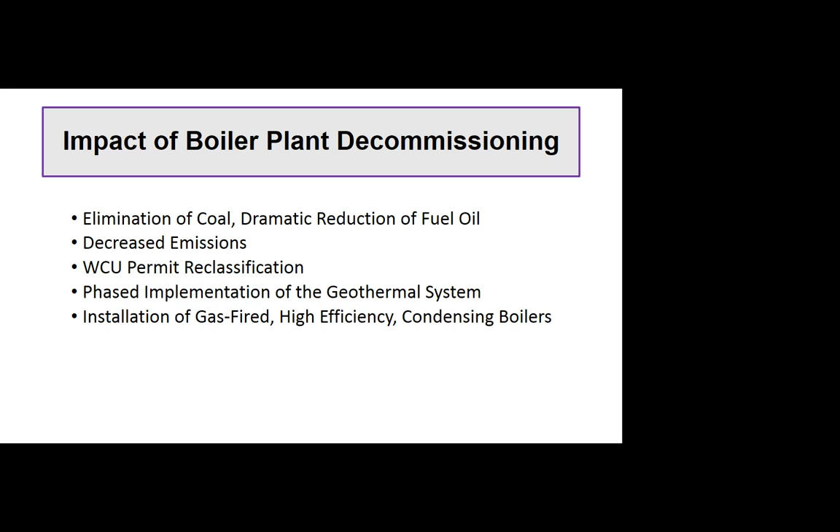So overall, I guess the takeaway is we replaced an energy source or energy sources that identified West Chester University as a major polluter. We actually replaced them with a renewable energy source, and that would be geothermal. And that was a huge success, actually, an impact on the university as far as sustainability.

Just to give you an idea what those emissions look like. This chart in the shaded area here, these are the energy sources associated with the boiler plant. And as you see, they disappeared after 2014. These are the CO2 emissions in tons of CO2 that were emitted when the coal was burned or when the oil was burned. These other three are what we use on campus anyway, which would be the natural gas, the electric, and then the fuel oil that's used in those 7 houses. The overall totals are shown here.

And you see, in this area here, prior to the decommissioning, we were in the 50,000 tons a year. That's what we were emitting from utilities. This is not the total amount because there are other sources. These are just amounts from the utilities. After the decommissioning, you could see we dropped into 30 to 35,000 tons a year, which was a big effect. So again, the impact is we were able to reduce our emissions in the area of 35 to 40%, which is a big number.

And the reason for this chart is to show that we continue to monitor all this, as you can see in yellow there. This is through January with fiscal year 2021's emissions due to the three energy sources there.

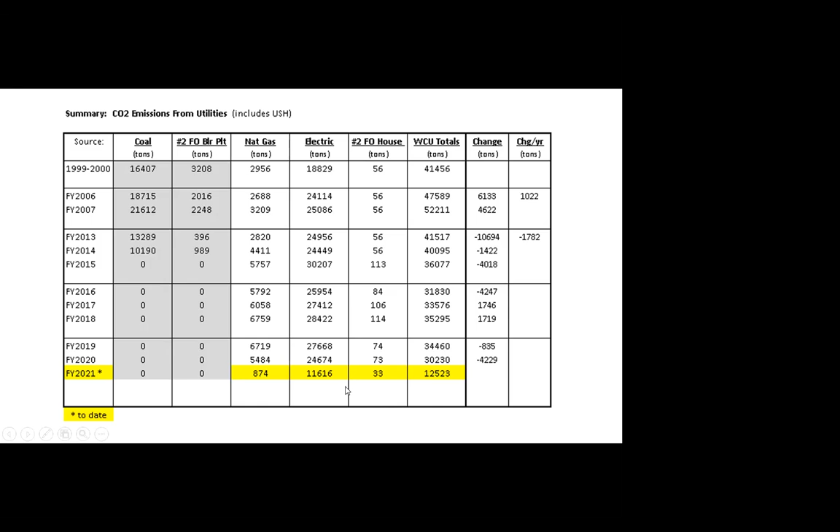As far as our current energy sources, we have both purchased sources and generated sources. Our purchased sources include electricity, natural gas, and fuel oil. For the electricity, West Chester University actually owns its own substation, which is located out there on New Street. From that substation, the electricity is distributed to a majority of the buildings on North Campus. And in addition to the substation, we also have a total of 48 individual PECO services that are connected to other buildings that aren't on the substation. The substation also services Sturzebecker, which is down at South Campus.

To supply the electricity, we do contract this out to try to get a good price. We work with PSFEI on this contract, which is Penn State Facilities Engineering Institute, a group of engineers and other experts up at Penn State whose services are available to West Chester University. So when the contract is up and we go out for another contract, we contact Penn State PSFEI, and they'll go out and ask other universities in PASSHE.

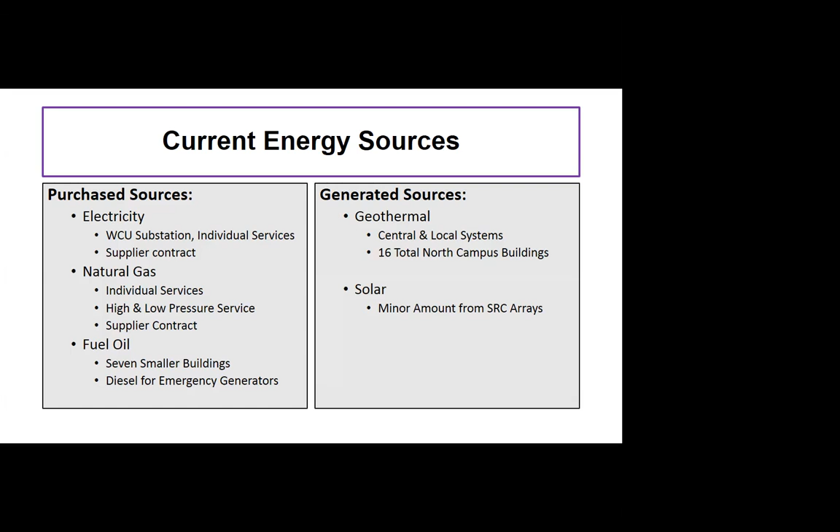So in total, there are 16 buildings on North Campus that are connected to a geothermal system. And then, as I mentioned before, we also have a solar system, which consists of 3 arrays that are mounted on top of the student rec center. And we'll go into that a little more later on in the presentation. Basically, that's our energy sources right now, and how they're divided into purchased and generated.

As I mentioned before, one of my responsibilities is to monitor and measure what we use. The majority of the data that we gather is actually based on the utility invoices. This is where we get the amount used in the buildings and what it's costing us per building. But we also get a lot of data from our BAS system, which is our building automation system. We need both to generate the data we need.

An example would be the electric energy that comes into the substation on New Street. From PECO, we get one bill for that substation. It's a big one, but it's one bill, and it gives you usage at the substation and the cost. Then from there, it's distributed to the different buildings. The way we know how much each building is using is that in each building, we have an electric meter that's set up and connected to our BAS system. So we can record the usage every month in that building, so we know.

Another example of using our BAS system would be for the geothermal. In each one of our geothermal buildings, we have a BTU meter. And from that meter, we can gather information on usage of geothermal energy in that building. We gather all this information, and from that, we can generate campus energy usage profiles for each one of these energy sources. So we know throughout the year, and each month, how much energy we're using from each one of these sources.

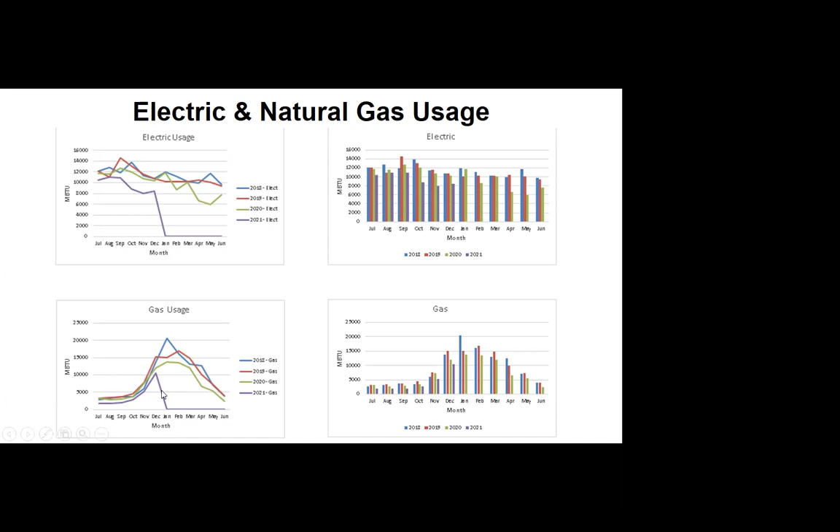Again, with the gas usage, you see it peaks out December, January. They're the winter months. That's what you would expect. You're using gas to heat the buildings in the winter months. And again, we see much lower usage in 2021, but that's because the set points are much lower. If we look at fuel oil and geothermal, fuel oil actually mimics the gas usage. It peaks out in the winter time because that's when you use it. However, you have to look at the range over here in the MBTUs, where you're in the hundreds here. Back in the gas usage, you're in the tens of thousands. So it's a big difference in how much is actually being used.

If you look at the geothermal, you'll notice that most of the geothermal energy is used in the summertime, July, August. That's when we're at our highest over here. This tells us that it takes a lot more geothermal energy to cool those buildings than it does to heat them. And this is reflected in what we see during our daily monitoring of the geothermal system. In the summertime, we'll see a much bigger temperature difference between the water going out to the system and the water coming back, and the flow rates are much higher. So we're using a lot more energy from the geothermal well fields.

In the summertime, in the wintertime, it's amazing, but a 2-degree difference at a lower flow rate is enough to heat those buildings out there. It's amazing to me, and it always was. But again, this just goes to show that we use a lot more geothermal energy in the summertime. And from this, we could do a lecture alone or a presentation alone just on this geothermal, because it explains why our well fields are heating up and things of that nature. But again, that's another presentation in itself.

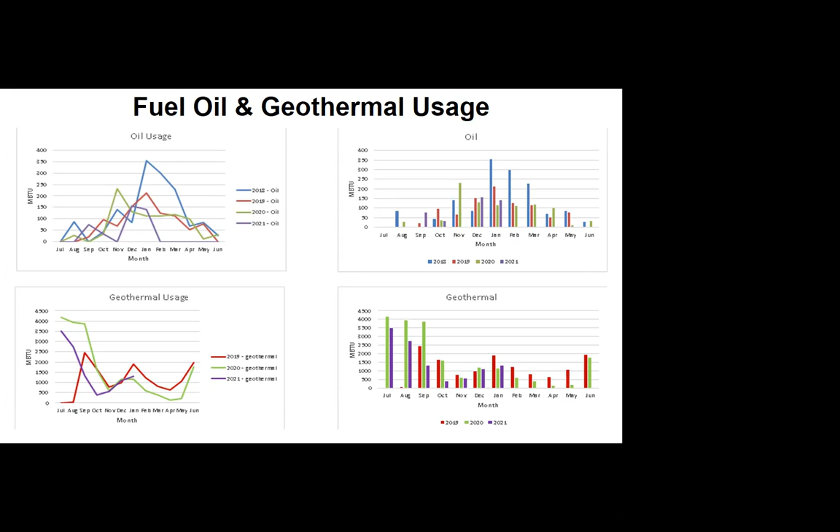But this just reflects what we see, and we know that we're using more energy to cool those buildings rather than to heat them. The total, if you put all these together, you look at the total. Again, this reflects what we see in gas and oil. So we're peaking out in December, and we peak out in gas and oil, which kind of directs our focus to where we should be looking in terms of efficiency during the wintertime. So basically, it's the same year to year to year. And again, you'll see a much lower in 2021 due to COVID changes.

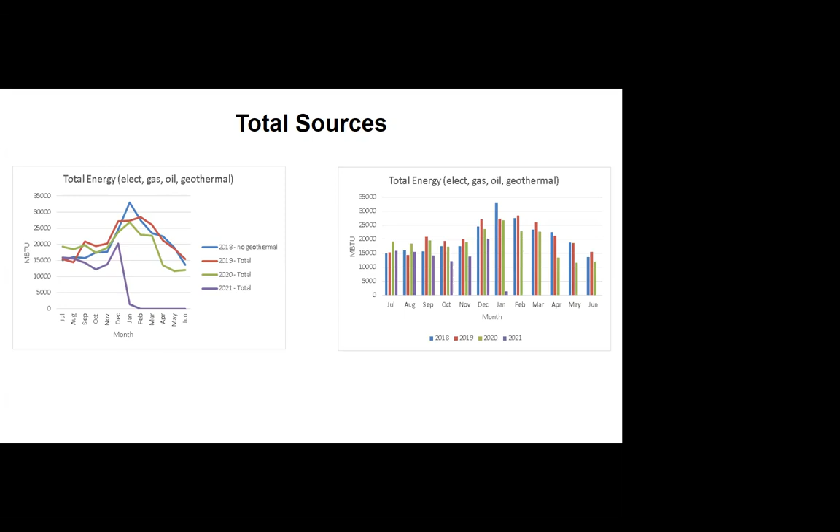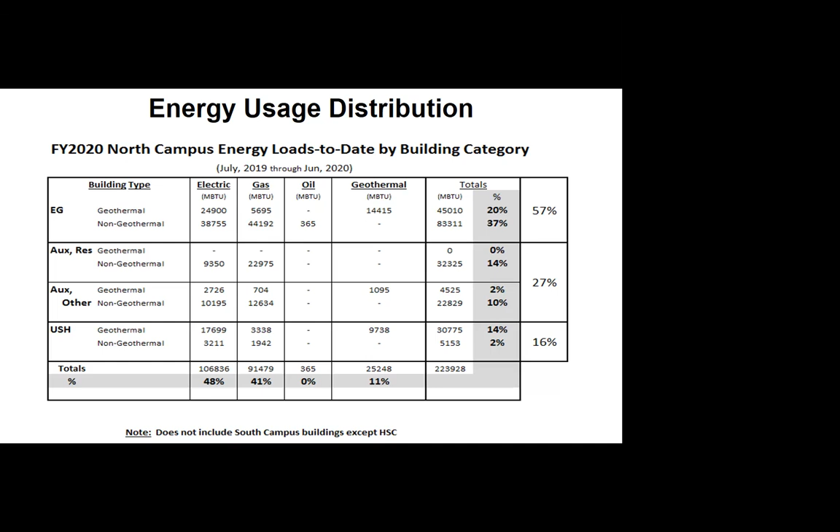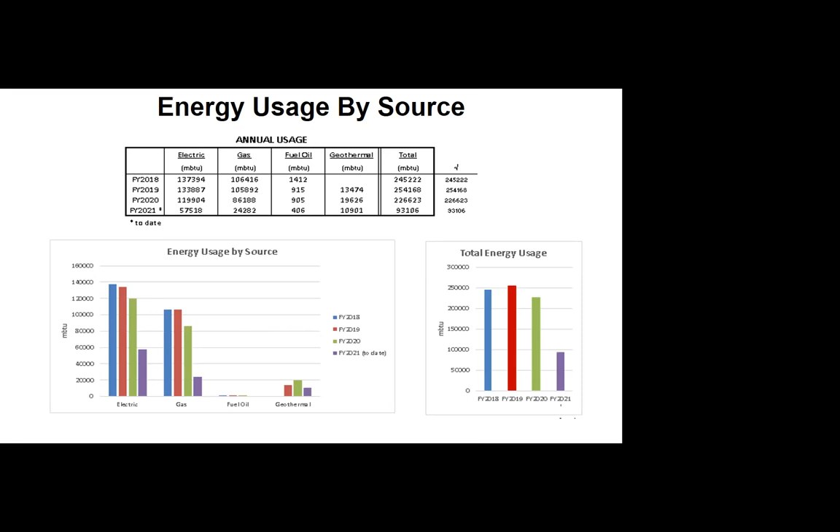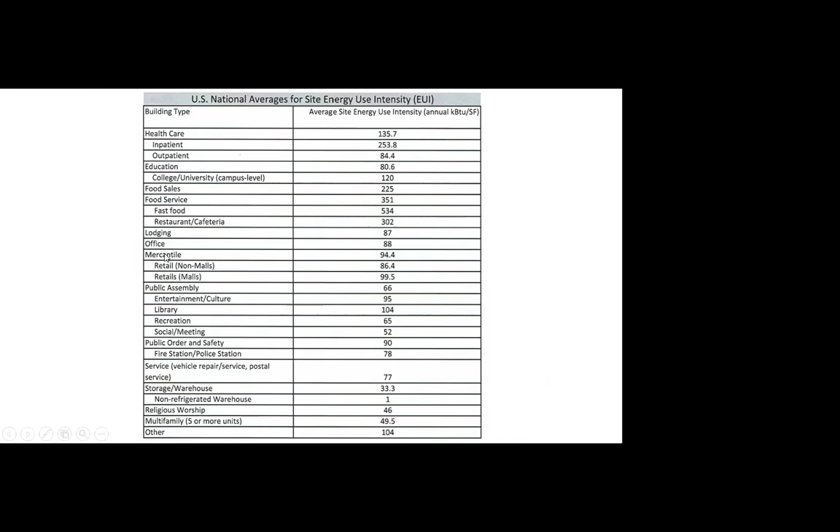We mentioned energy usage index, which is usage per square foot. There's a U.S. national average out there, and this is a list of those national averages for EUI. If you look down here to education, and more specifically college or university, on a national average we should be using about 120 kBTUs per square foot of building, which is 0.12 MBTUs per square foot of building. Keeping that in mind, I know you can't see this, and I couldn't get the whole chart on there, but I just wanted to show you that we track this. This is actually over here on the left side.

This is actually the same distributions I showed on our distribution slide. So this will be for the E&G buildings, and this chart goes down further. But for the E&G buildings, non-geothermal, our average EUI, which is right here, is 0.022 MBTU per square foot, and that's much less than 0.1. It's a factor of 10, which is really good.

And then at the same time, I track our dollars per MBTU, and right now for this type of building, we're tracking about 23 bucks a square foot, an MBTU that we're spending. If you go down this chart further, the highest you'll see on that chart is 0.53 for an EUI, and that's for auxiliary dining non-geothermal.

So again, we're far below the 0.12 that we're supposed to be if you want to look at the national averages. But right now, I think personally we set our own bar, and we go up and down there. So by continuing to do this, we'll generate where we should be on our own average and try to stay at that point. But that chart's back there on my wall, so I know you can see that as clear as day, so we're good.

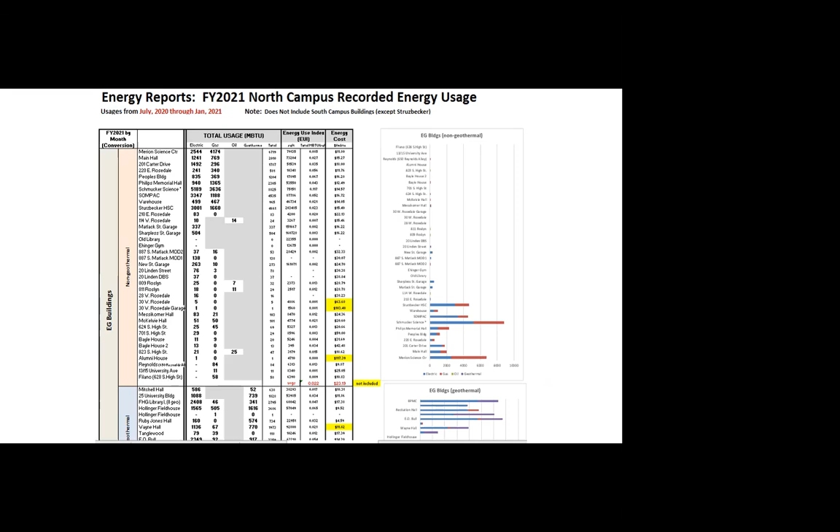Okay. This I threw in here because it was a little eye opener to me. I just wanted to share it with you. I was trying to determine how much per MBTU that we spend for electricity, for natural gas, and for geothermal. For electricity and natural gas, it's a pretty straightforward calculation because you have all the numbers. So in fiscal year 2020, which this shows here, we could pretty much calculate what it cost us in electricity and gas. But for geothermal, it's just a little trickier.

And this is by no means a rigorous calculation. It just gets us in the ballpark. But what I did, if we take fiscal year 2020, for example, each month we have a BTU meter in the pump house, which tells us what the BTUs are going out to the entire system, and that's registered right here. So in August of fiscal year 2020, we had 3,948 MBTUs go out to the system. In the pump house itself, there's a meter that tells us we use 138,000 kilowatt hours.

And based on the fiscal year cost per kilowatt hour, we came up with the cost. So we know the usage, we know the cost, we come up with the cost per MBTU. So we see here in fiscal year 2019, we averaged $3.40 an MBTU to generate geothermal energy, 3.25 last fiscal year, and to date we're 3.46. Compared to right here, electricity fiscal year 20 almost $20 an MBTU, gas almost $8 an MBTU.

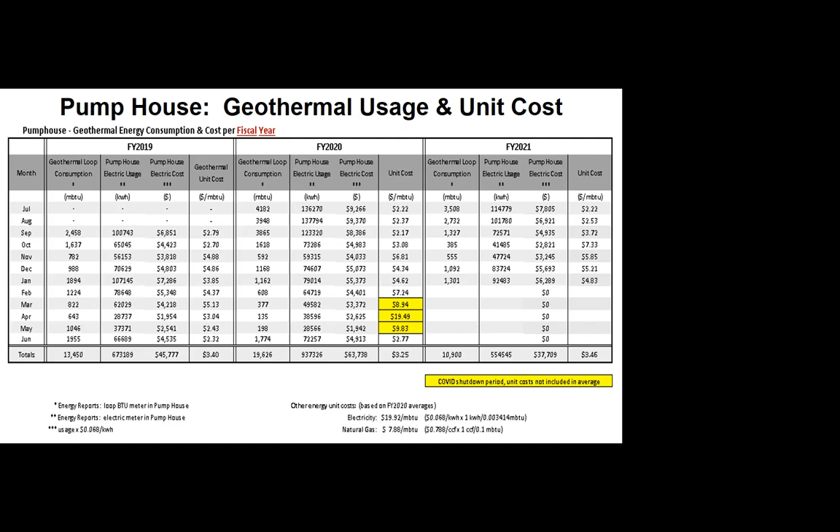So you could see. But going back to that one bar graph, changing that graph a little bit not only impacts sustainability, but it has a financial impact too. And it's shown right here. Again, this isn't a rigorous calculation. It just gets us in the ballpark. But it shows you there's quite a difference.

The solar that I spoke about earlier, we have 3 arrays that are on the roof of the student rec center, and through our building automation system, we can go back. And I went back to April of last year, and I came up with the amount of megawatt hours being produced by these arrays each month. And right now we're averaging about 2.2 megawatt hours a month, which is good.

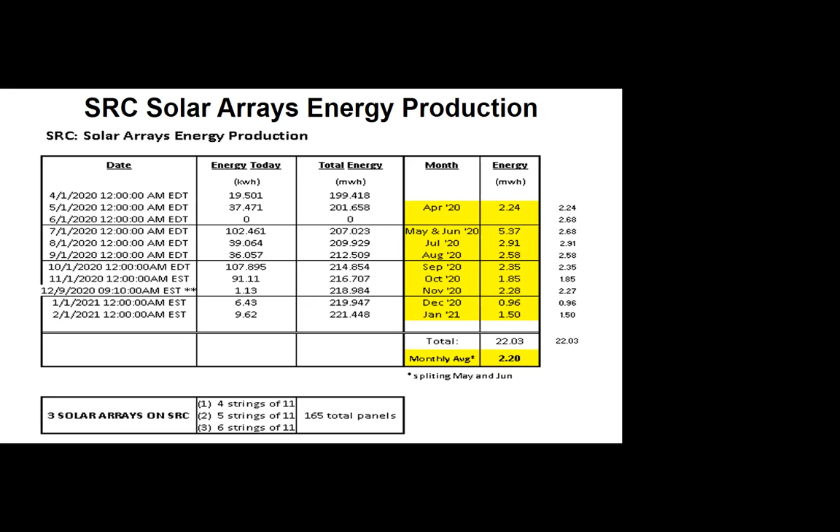Okay, but in overall terms, even though this is good, that amounts to about 26 renewable energy credits a year, which is good, but it's not much. That's why I said it's minor. But all the energy that's generated by the solar array goes right back into the building. It doesn't go back to the grid. We don't get any credit for it. It just goes right back into the building that's being used. But that just shows you that we do measure this too. We have the ability to measure it, and we do keep an eye on it.

As far as controlling energy on campus, this is strictly from an operations standpoint. Our number one and primary control is through the building automation system, the schedules and the set points that we could establish for each and every building. We have occupancy schedules, we have non-occupancy schedules, and we have the set point. So by manipulating this a little bit, we can control our energy usage.

And hopefully by keeping an eye on us, we get every week, I forget who does this, but we get a record of where events are being held and how long. And we will adjust our set points for that particular building to accommodate those people, and then they go back into unoccupied. So we're doing the best we can as far as controlling energy with what we have.

We also can control our supplier contracts too. This has more of an impact on cost than it does on usage, but still it's an impact. So by going out and continuing to try to get the best prices we can, we'll do that, and that's within our control. Renewable energy credits: we control how much we purchase. So we can purchase more, get more credit to go against our carbon footprint, or we can purchase less. And I have a slide coming up to show you our past purchases there. So we do have the ability to control that.

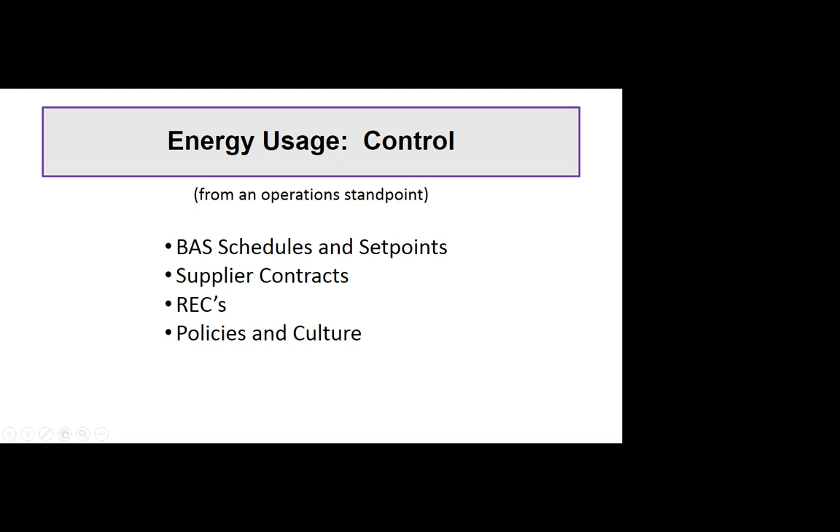But the idea is to get the word out there. And believe me, I'm not an expert on this, and I don't have any background. I'm a numbers man. But at the same time, I know how important it is to get that message out there, to be very mindful, to be very conscious, to be very aware of how much energy you're using and in what way you're using it, because it will impact the university and its goals of achieving a high sustainability.

The renewable energy credits, the amount that we purchase is usually based on how much we use in electricity. In past years, we always purchased 30%. I can't tell you where this number came from or what it's based on, but that's what we did. We always purchased for 30%, which amounted to 12,000 megawatt hours. In 2019, the decision was made to purchase 100%, which is 45,000 megawatt hours. And then we dropped back down to 30% in the last contract, which was a 2-year contract.

When we do go out to purchase renewable energy credits, we again work with PASSHE. We will go out with West Chester, with other universities, and try as an aggregate to get the best price we can. And it works, it really does. But as you see, prices go up and down here. And it all depends on the market and what everything's doing at the time.

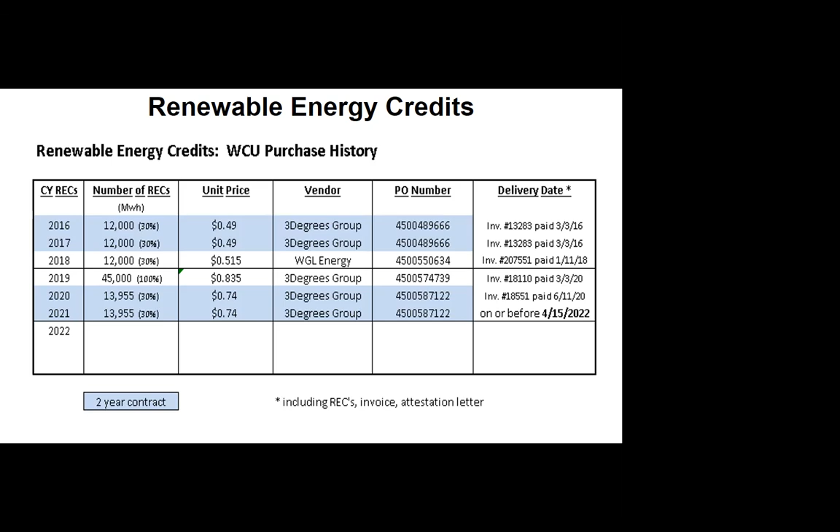But right now we're good through 2021, and 2021's renewable energy credits actually will be delivered in the beginning of 2022. So sometime during this year, I expect to be going out to purchase more renewable energy credits, and I'll be approaching upper management to see how much they want to buy, and then we'll just go from there.

As far as making improvements and having opportunities to improve, I think one of the first things we have to do is continue trying to understand our buildings and the systems within our buildings. I think this is really key to making some improvements. I just want to make sure I don't miss anything. I'm just skipping through my notes here.

If we look at our buildings, we look at it structurally, we look at the efficiency of the building itself, and not only the buildings, but the systems. We want to know what the ability of the system is, what the limitations of the systems are, and what can we do to be most effective in trying to increase our efficiencies as far as energy usage in those buildings.

I'm excited about this. One of the key projects that we're working on now is building core temperatures. We want to try and establish what is the core temperature of each individual building on campus. This will tell us where the building, for lack of a better word, idles. In other words, based on its structure, based on its makeup, based on its systems and this and that, the buildings will idle at a different temperature, a core temperature.